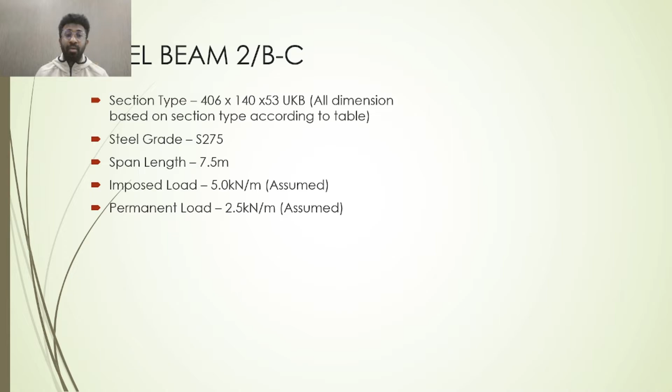My first is steel beam, section type 406 x 140 x 53 UKB, all dimensions based on section type according to table. Steel grade S275, span length 7.5 meter, imposed load 5.0 kilonewton per meter assumed. Permanent load is 2.5 kilonewton per meter assumed.

Steps used to calculate steel beam buckling resistance. First, find self weight of beam to calculate design load. Next, from the design load, get reaction force on both supports to calculate shear force diagram and bending moment diagram. Next, find yield strength and section classification, class 1.

Next, find shear area to calculate shear resistance. Then calculate design check for shear using value from shear resistance and shear force. Then okay, find moment resistance and design check for moment using value from moment resistance and design moment. Then it is okay. Next, calculate elastic buckling moment.

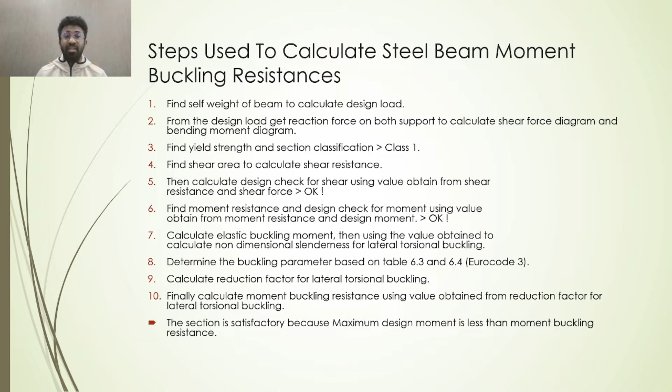Then use the value to calculate non-dimensional slenderness for lateral torsional buckling. Next, determine the buckling parameter based on table 6.3 and 6.4 Eurocode 3. Then calculate reduction factor for lateral torsional buckling. Finally, calculate moment buckling resistance using value obtained from reduction factor for lateral torsional buckling. The section is satisfactory because maximum design moment is less than moment buckling resistance.

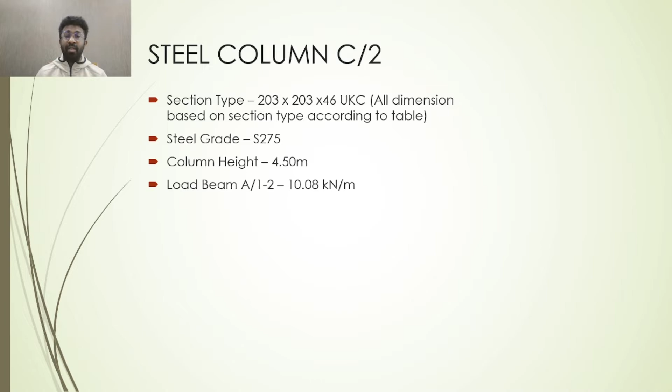Next, I talk about steel column. Section type 203 x 203 x 46 UKC, all dimensions based on section type according to table. Steel grade S275, column height 4.50 meter, load beam 10.08 kilonewton per meter. Steps used to calculate steel column lateral torsional buckling.

First, find cross-section length including eccentricity and section length beam. Next, find external load from level 1 to ground floor. Find nominal moment at level 1 about y-axis and z-axis. Calculate distributed moment at level 1 about y-axis and z-axis. Calculate minimum buckling resistance, which is column slenderness about y-axis and z-axis.

Next, find column imperfection about y-axis and z-axis based on table 6.1 Eurocode 3. Find reduction factor about y-axis and z-axis and take the lesser value, considering the worst case scenario. Then calculate elastic critical moment and buckling parameter using table 6.5 and table 6.3 Eurocode 3.

Calculate lateral torsional buckling resistance and section resistance to calculate interaction equation. Interaction equation is less than 1.0. Then interaction condition is satisfied.

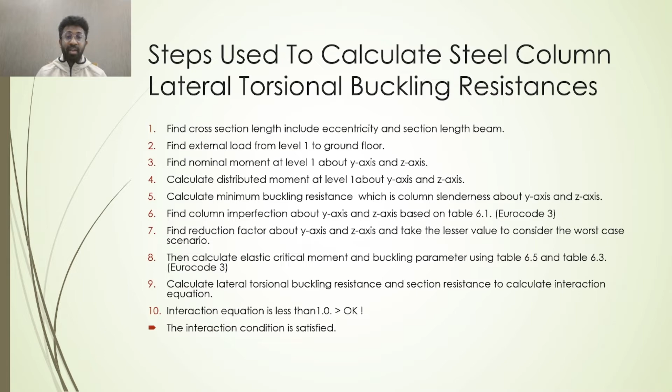Next, steel connection, bolted column beam connection in torsion. Ultimate load is 120 kilonewtons, diameter 24 millimeter, number of bolts is 10, Fu 430 Newton per millimeter square, holes E1 is 300 millimeter distance between center of holes, E1 50 millimeter, P1 100 millimeter, d0 26 millimeter.

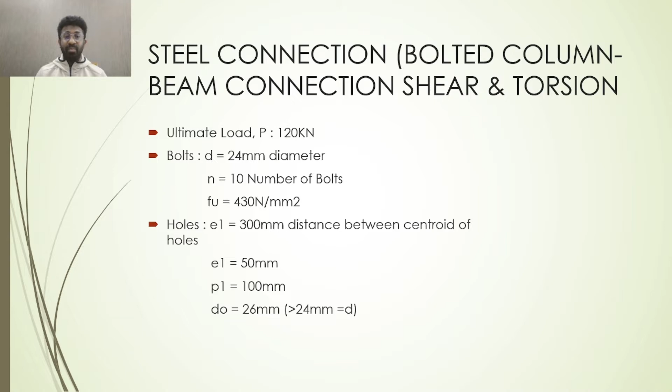Steps used to calculate steel connection. Find the direct shear. Next, calculate shear due to torsion in bolt A. Next, calculate resultant shear FR in bolt A. Now let's try 24 millimeter bolt diameter. This hole diameter should be bigger by at least 1 mm at each side of the bolt surface.

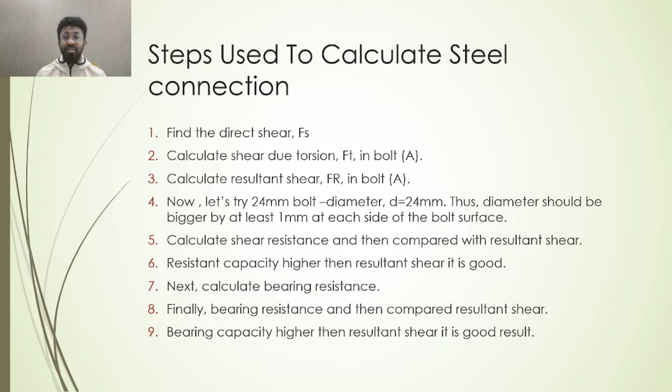Next, calculate shear resistance and then compare it with resultant shear. Resistance capacity is higher than resultant shear, it is good. Next, calculate bearing resistance and then compare it with resultant shear. Bearing capacity is higher than resultant shear, it is a good result. This is the attachment of beam, column and steel. This is the result. Thank you.

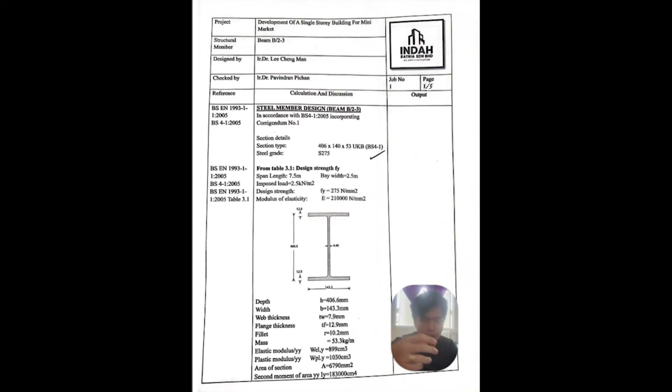Good morning, Engineers. My name is Lee Cheng Man. My matric number is 201222960. My project title is development of a single story building for a mini market. My structural member is beam B/2 to 3. So this is a steel member design.

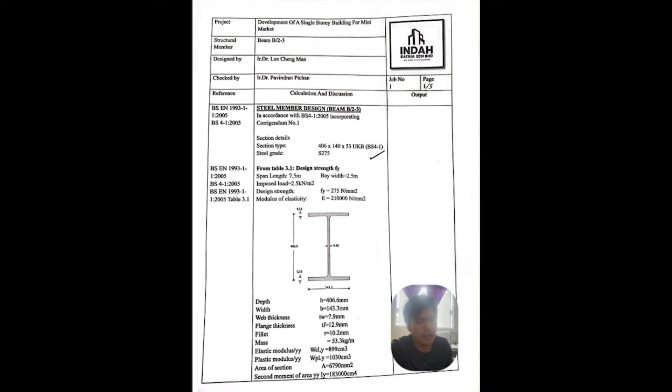I'm taking the section type of 406 x 140 x 53 UKB. The steel grade will be S275. This is the data that I am assuming. ULS combination, self-weight of the beam, we get 0.523 kN per meter, and for the Gk we get 3.023 kN per m, and for the Qk

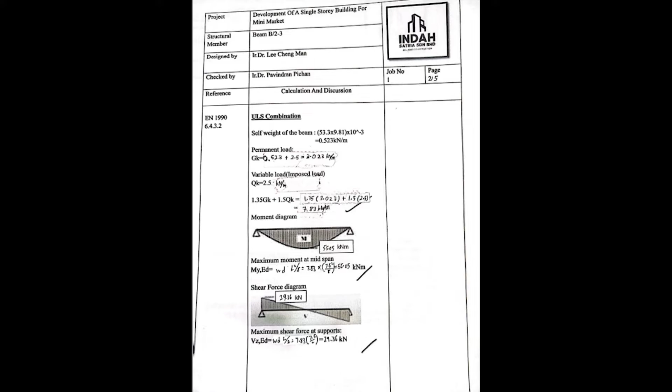we get 2.5 kN per m, and by using the formula 1.35 Gk plus 1.5 Qk, for the total design load we get 7.83 kN per m, and for the moment diagram we get 55.05 kNm by using the formula wd L squared over 8, and for the shear force diagram we get 29.36 kN by using the formula wd L over 2. Here will be based on table 7 of EN 10025.

TF we're getting 12.9 mm, and FY we're getting 275 Newton per millimeter square. For the section classification, based on calculation we'll be getting 0.92, and for the outstanding flange we're getting an answer of 8.28, which is classified as class 1. The internal compression part will be 66.24. This is the final calculation, and it is also classified as class 1.

Next is moment resistance. For the moment resistance, based on the calculation of the equation, we're getting an answer of 0.194, which is less than 1 and considered okay. For the shear area, we're getting an answer of 3457.9 mm square, which is larger than 3008.3 mm square. There are two answers here. We use the bigger value, so we take 3457.9 mm square. Next is shear resistance. The shear resistance is based on the formula. Finally, we're getting an answer of 549 kN.

Next is the shear buckling check. The shear buckling check is based on formula 2. Finally, we're getting an answer of 66.2. There is no shear buckling verification required for this calculation. Finally, the design check. Based on the formula like this, we're getting 0.05, which is less than 1.0, so the section is considered satisfactory.

Finally, for our moment buckling resistance. By using the formula, we finally get 76.48 kNm, so the section is considered satisfactory because it's larger than the MED, which is 55.05. That's it for my beam part.

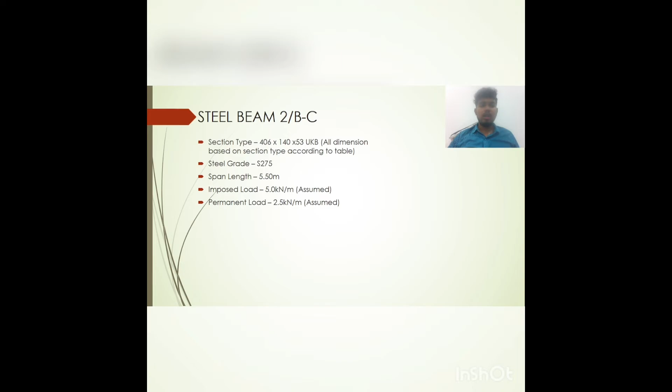Today I'm going to make a presentation video for my Structure Design 2 mini project. For my part, the steel beam that I calculate is 2/B-C. The section type that I suggested is 406 times 140 times 53 UKB. All dimensions are based on section type according to table. The steel grade is S275. The span length is 5.5 meter. Imposed load is 5.0 kN per meter as per assume, and permanent load is 2.5 kN per meter as per

assume 2. Okay, these are the steps that I used to calculate steel beam moment buckling resistance. First, find self weight of beam to calculate design load. Then, from the design load, get reaction force on both supports to calculate shear force diagram and bending moment diagram. Then find yield strength and section classification. For my beam, the section classification is class 1. Then find shear area to calculate shear resistance. Then calculate design check for shear using value obtained from shear resistance and shear force.

The result for my beam is okay, and same goes for the moment. The result is okay for my beam. Then calculate elastic buckling moment, and using the value obtained calculate non-dimensional slenderness for lateral torsional buckling. After the calculation, determine the buckling parameter based on table 6.3 and 6.4, refer to Eurocode 3, then calculate reduction factor for lateral torsional buckling. Finally, calculate moment buckling resistance using value obtained from reduction factor for lateral torsional buckling.

So overall, the section that I have suggested is satisfactory because maximum design moment is less than moment buckling resistance.

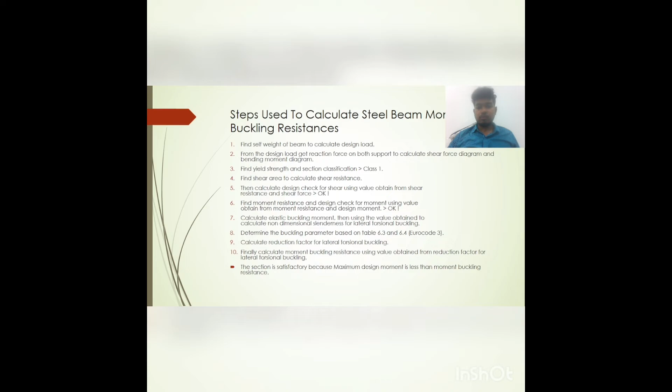Okay, for part steel column, my part is C/2. The section type that I suggested is 203 times 203 times 46 UKC. All the dimensions are based on the section type according to table. The steel grade is same as beam, S275. Column height is 5.5 meter. Load beam C/1 to 2 is 10.08 kN per meter. Same as load beam C/2 to 3 is 10.08 kN per meter, and load beam 2/B to C is 11.58 kN per meter, as calculated.

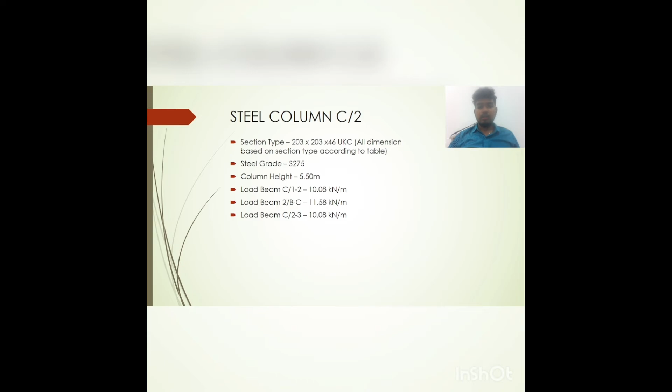The steps used to calculate steel column lateral torsional buckling resistance are: firstly, find cross section length including eccentricity and section length beam. Second, find external load from level 1 to ground floor. Third, find nominal moment at level 1 about y axis and z axis. Fourth step is calculate distributed moment at level 1 about y axis and z axis. Fifth step is calculate minimum buckling resistance, which is column slenderness about y axis and z axis.

Then find column imperfection about y axis and z axis based on table 6.1, refer to Eurocode 3. Then find reduction factor about y axis and z axis and take the lesser value to consider the worst case scenario. Then calculate elastic critical moment and buckling parameter using table 6.5 and table 6.3, refer to Eurocode 3 again. Then calculate lateral torsional buckling resistance and section resistance to calculate interaction equation. Interaction equation is less than 1.0, so it means the suggested section is okay. The interaction condition is satisfied.

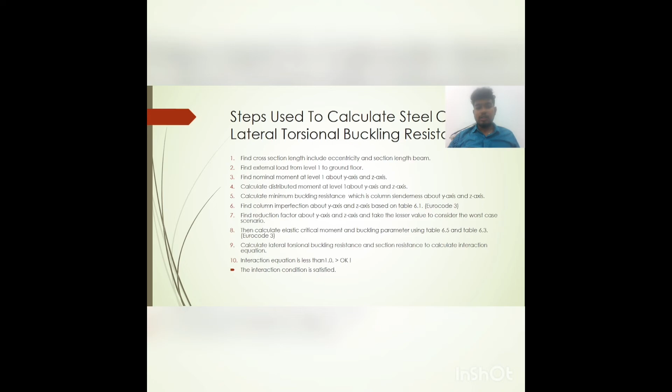Then the timber joist. Okay, this is the last part for me in this mini project, which is timber joist, suspended timber floorboard. The service class is 2. The service class is identified by my team member who did the timber beam calculation. Then the kmod is 0.8, joist center to center is 500 mm, permanent action is 0.167 kN per meter, includes self weight, variable action is 2.5 kN per meter.

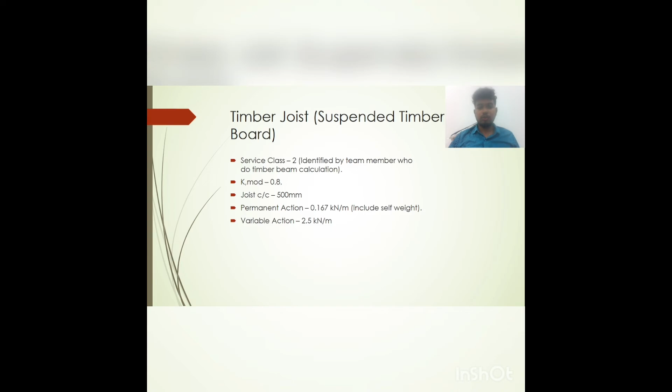Okay, the steps used to calculate section size for main joist timber are: firstly, find the design load using permanent action and variable action, then calculate design bending moment and design bending strength with assumed depth of 150 mm. Third step is find section properties using value obtained from design bending strength. Then calculate design shear force, design shear strength, and design shear stress. After the calculation, compare the design shear stress and design shear strength.

For my calculation, the design shear stress is less than design shear strength, so the suggested size for main joist is okay. The joist is adequate with respect to shear. Then calculate design bearing force, design bearing strength, and contact length of bearing and design bearing stress. Using equation 6.3 from Eurocode 5, the section is adequate with respect to bearing.

Then calculate lateral torsional stability using equation 6.33 from Eurocode 5 to check design strength. Okay, for my calculation, the design stress is more than design strength, so the result is not okay. So the suggested size for main joist is not okay, so it's recommended to increase the section size.

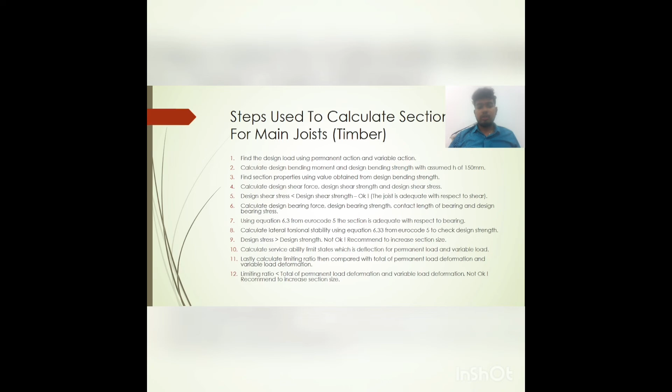Then calculate serviceability limit state, which is deflection for permanent load and variable load. Lastly, calculate limiting ratio, then compare with total permanent load deformation and variable load deformation. So for the calculation, the limiting ratio is less than total of permanent load deformation and variable load deformation. So the section size that I suggested earlier is not okay. So it is recommended to increase the section size. And this is the attachment for beam, column, and timber joist for the deflection part, which means the last part.

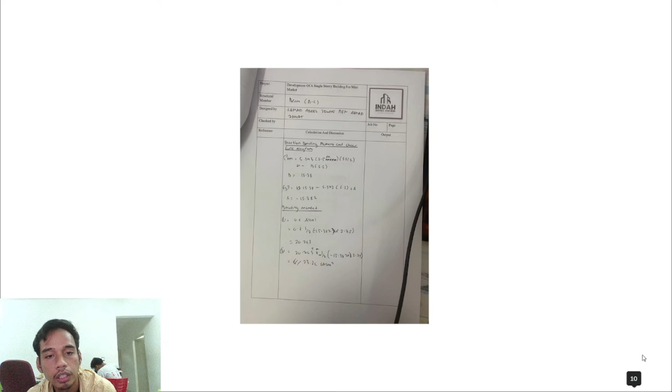Then I convert to kN per meter. Then I get the Gk is 0.1581 kN per meter. And then Qk I get 3.0 kN per meter. And then 1.35 times Gk, and then 1.5 times Qk, and then I get 5.5935 kN per meter. And then the reactions, bending moment and the shear force diagram, I get the B is 15.38, and then I get the A is negative 15.382, where the negative represents the direction of the shear force diagram.

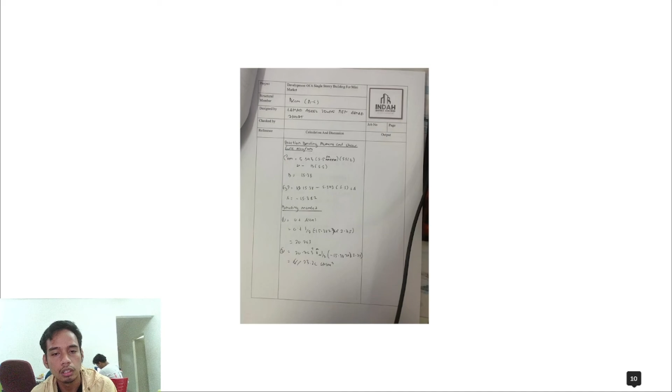And then the final bending moment is 23.26 kNm. And then I get the reduction factor for LTB is 1.1, and then the buckling resistance moment I get 547.52, which means that 23.26 kNm MEd is less than 547.52, and then the section is satisfied, okay.

For the column, the height of column is 7.5 meter. The beam load is F1 only, in Z direction 22.8 kN per meter, and then added by load timber 7.58 kN per meter, and then I choose the same column design 305 times 305 times 240, and then the analysis of the loads, I get the self weight of the column is 0.247 kN per meter, and then the NEd I get 30.627 kN after I add all of the loads from the previous results.

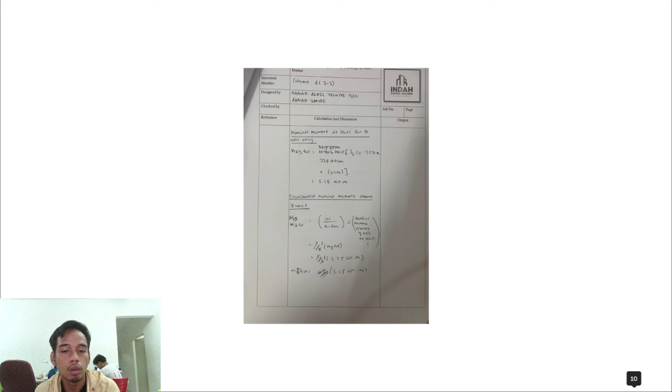And then the nominal moment horizontally is 5.15 kNm, and then the MEd I get 5.15 kNm, and then the interaction equation that I get is 0.227 divided by 4.75, and sum of 1.5 times 5.15 divided by 536, and then I get 0.073 plus 0.014, and then the final answer is 0.087, and it is satisfied because it's less than 1.0, so the section that I choose, 305 times 305 times 240, is satisfied.